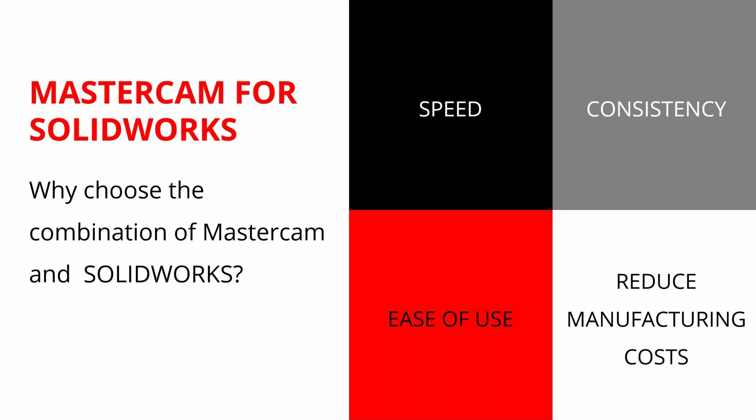So what we're going to be talking about, the first portion of this, is the design process. And how we do that is we use a table, much like the one that you see there, to update a design. I'm going to use a 16.5 ASME flange. For you guys that are familiar with that, you're going to see a lot of the same numbers there. So we're going to go through the design, and we're going to start with one finished design.

So we're going to develop one size, and in the model, I'm going to choose the 4-inch size to start with. Then we're going to go forward with an update using the table of dimensional values that we can source on the internet or get from our vendor or even get from our customer, and leverage the power of Excel to accomplish that.

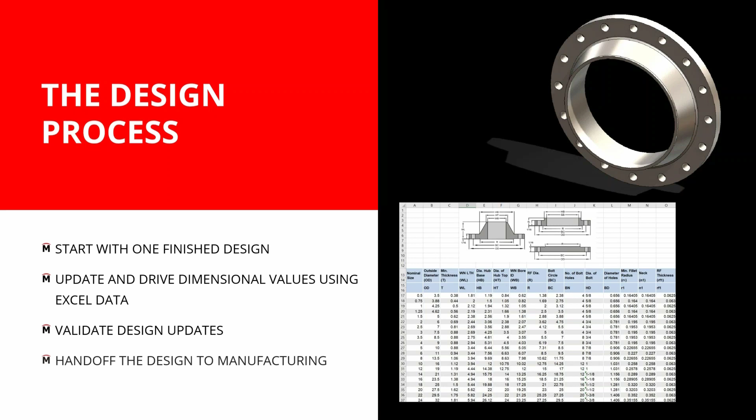Beyond that, we'll validate the design, make sure that all the updates are correct, dimensional values are good, and then we'll go forward with the handoff to Mastercam for SOLIDWORKS, and Danny will take it over from there. When we design something, this is the finished product of what we're going for. When we design it, we want to take an approach of how do we design it, how do we get that to go in correctly, and by doing that, we're going to create a revolve, and then we're going to do some other things.

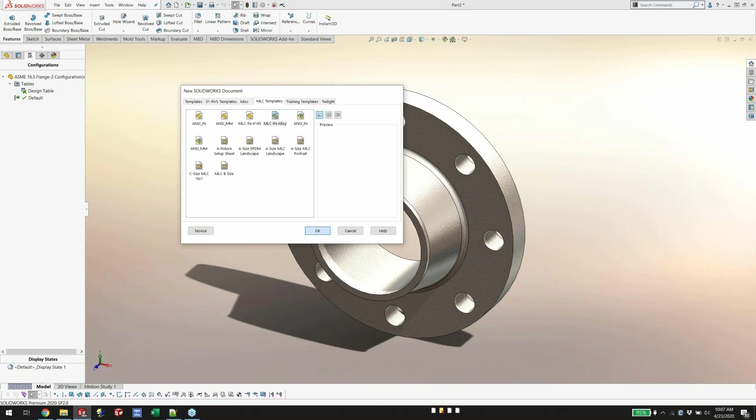So I'm going to show you guys how to accomplish that straight away by just accepting a new design template. Taking that across, we can start with our Z in the correct direction in SOLIDWORKS as well, and just design away. Now, a revolve requires a center line or something to revolve about, and that's the first step in the process. So once we get that far, we'll then start to design the weld

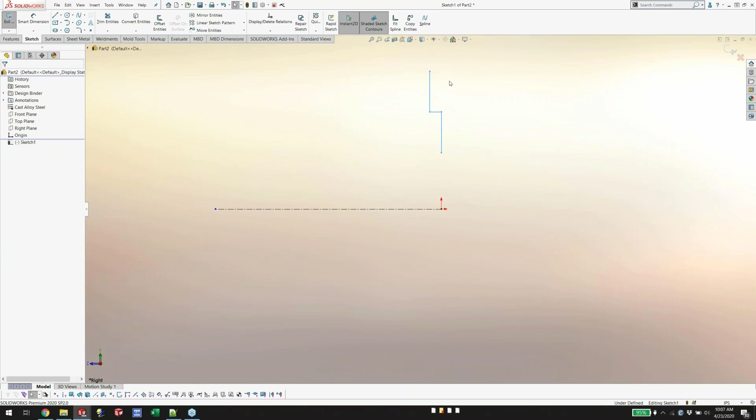neck itself. We'll just design a few things as we go along, and if you guys see something that I'm doing that you want to find out more about, don't hesitate to drop that in the chat, and we'll be able to answer that for you. But as we design, we'll take all of these automatic relationships and things that are happening in the design process, and we'll leverage that to create a finished design very quickly and easily.

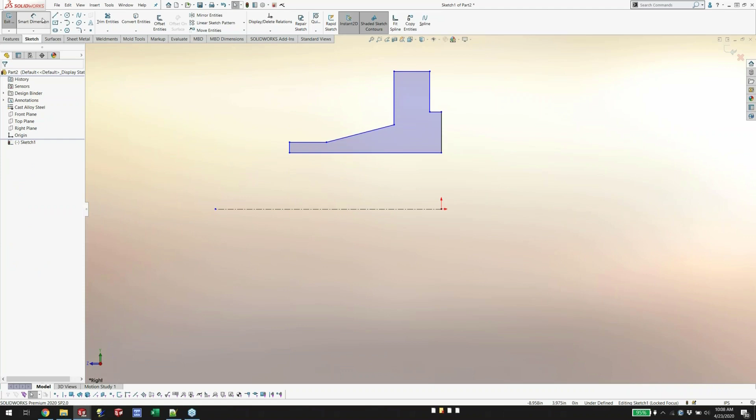Now, what I'm doing is just drawing out an exact profile of what we want. The first dimension value that goes on might be this raised face value in our table. And this particular value is 6.190. And in this case, I've drawn it to the half, so we'll make sure that we divide by 2.

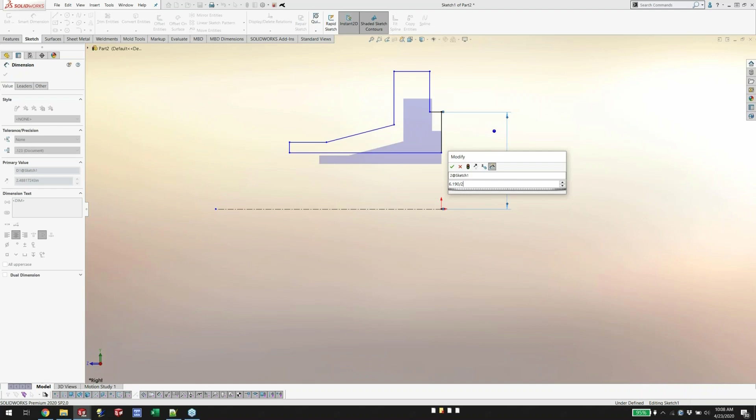SOLIDWORKS has the power to leverage fractions, additions. You don't have to break out the calculator in order to accomplish any portion of the design process. So taking this, we want to go ahead and put in RF1. Now I'm using the codes and I'm naming the dimensions as we go along, so that the dimensional values that we understand from ASME are also going to be held and be there.

So our thickness value, the next one that we need, pretty easy to do there. We'll go ahead and put .88. But if for some reason you forget, you can always open up that panel. You can always go through and relabel, redimension, and adjust anything that's necessary.

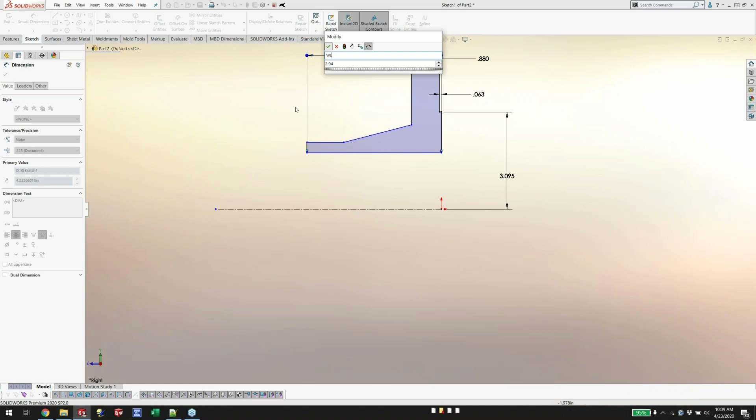Now, the few things else that I want to go ahead and accomplish here are just a few more dimensions. Let's go ahead and put in 2.94, and that is our weld neck length. So the length of the design there, great. Those are easy to do. Sometimes it gets inverted. We can go back and we can adjust the design, kind of reposition it. It's not a problem at all. We'll go through. I've got about 4 more dimensions or so that we've got to put in.

Things like the bore size, weld bore, and that number. We'll go ahead and put that one in. Let's see. Now I'm going to continue putting in the values that we need, and as we go through this, you'll notice the ease of use is coming along. I didn't have to choose that I wanted a diametrical dimension there. It went ahead and did that for me. By leveraging that, it understands that I'm in kind of a mode in the process and I'm batching dimensions, and it takes that into effect as well.

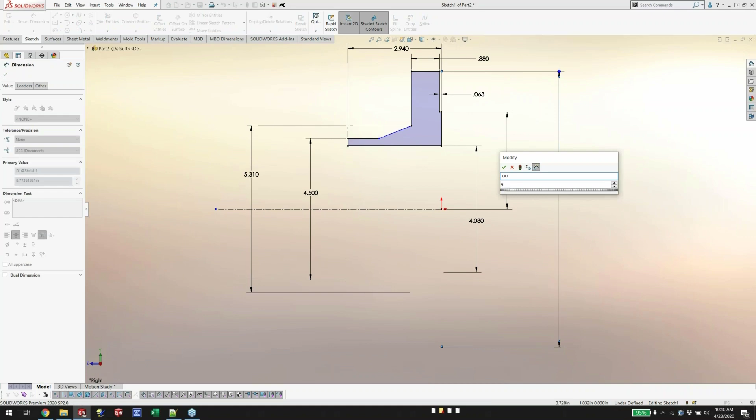So now the last one, but absolutely not the least, we'll go ahead and put the OD on this. We'll make that a 9-inch dimension and mark that as the OD. So as we get finished with this, you'll see that SOLIDWORKS understands that I'm just about done, and down in the bottom right-hand corner, you'll see that right now it says underdefined. And as we go forward with this last dimension, you'll see that that name will change to tell me that I have every dimension that I need for manufacturing of this particular profile.

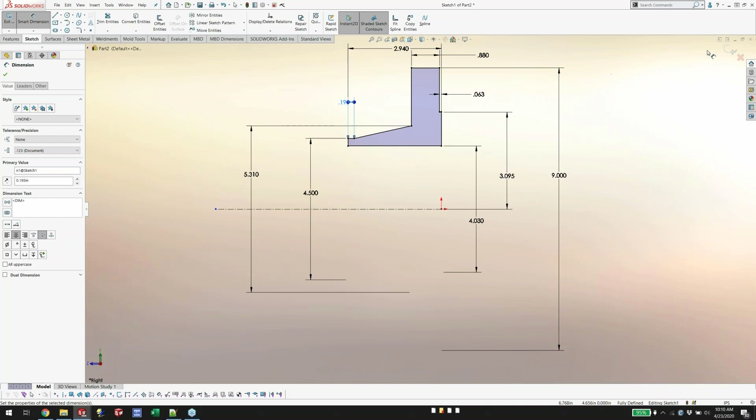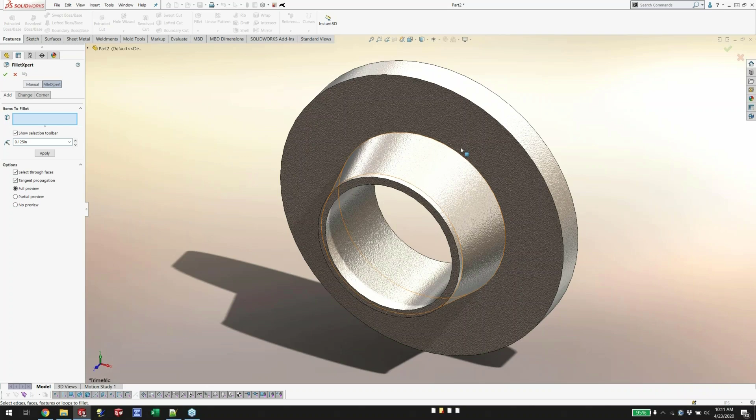As we go forward now, we can revolve this and take everything out to the third dimension. Go ahead and revolve the shape and create the basic shape for the weld neck. Now, the next thing that I'm going to do is add a fillet to it. So this particular fillet adds an edge, but I could very easily add multiple edges in the same fillet if necessary, or even round off an end. All of that's possible within the design, so we can take all those values.

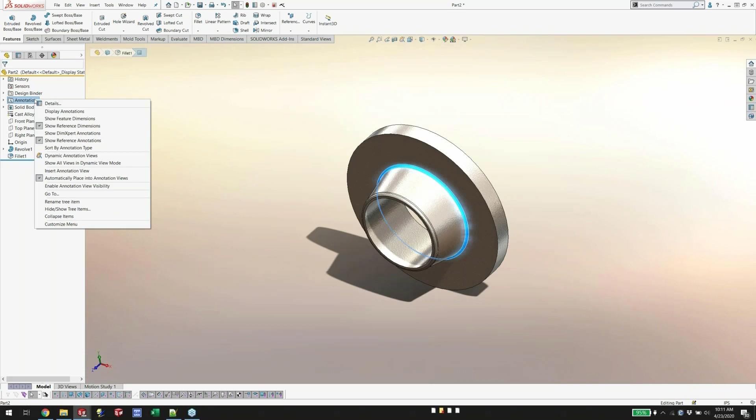Any one of the feature dimensions that we have, or anything that we need here, we can adjust by just taking a look at our feature dimensions. These dimension values for features are also in there. So in this particular case, we need to make sure that this particular fillet is marked as an R1 for our radius, and give the value that we need. So that's a pretty easy way to adjust the dimensions there.

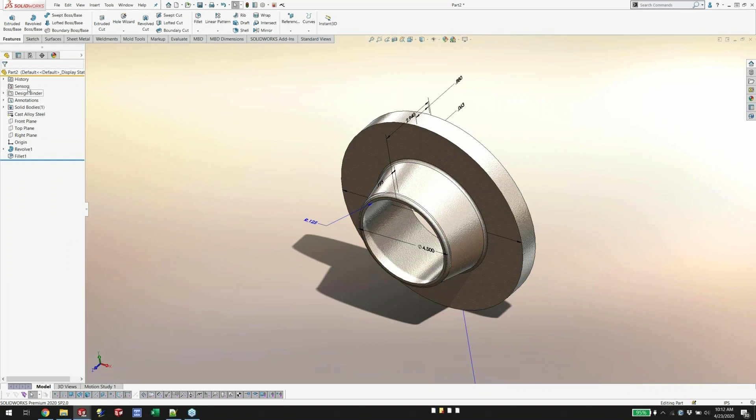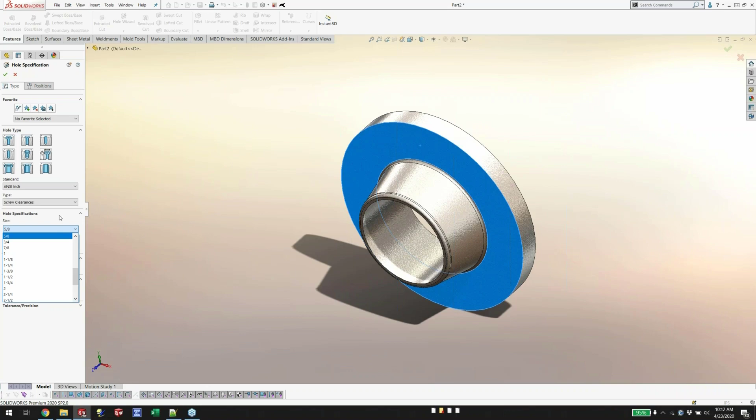The last step in the process is to go ahead and put some holes on it. So we have the power in SOLIDWORKS to use what we call the Hole Wizard. The Hole Wizard can help us leverage design processes for screw clearances in loose fit tolerancing, or even close fit tolerancing. I choose the particular size bolt that I want to put in, and it's going to calculate the tolerance based on that. So when we position this, we want to make sure that we have a bolt circle first. That bolt circle is going to define where this is located in the hole design.

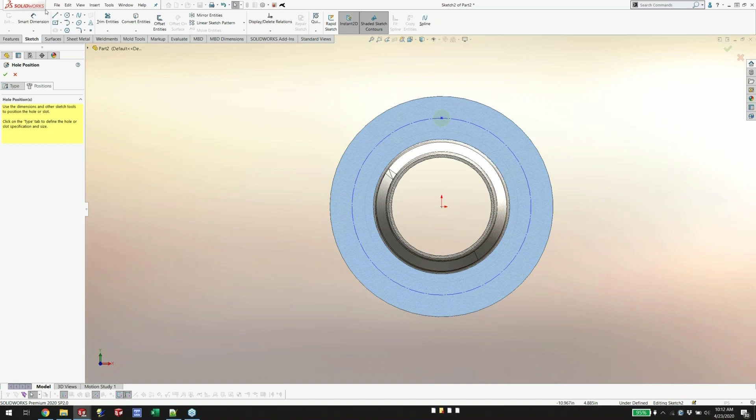Once that's done, we'll go ahead and place in our single top hole at the top dead center. Now, if you wanted that off at an angle, you could absolutely do that. Just dimension a few reference lines, and you're all set. This number is 7.5, and we want that to be the bolt circle, so indicating that as well. So I'm almost done. I think we're pretty close to being finished up with the weld neck.

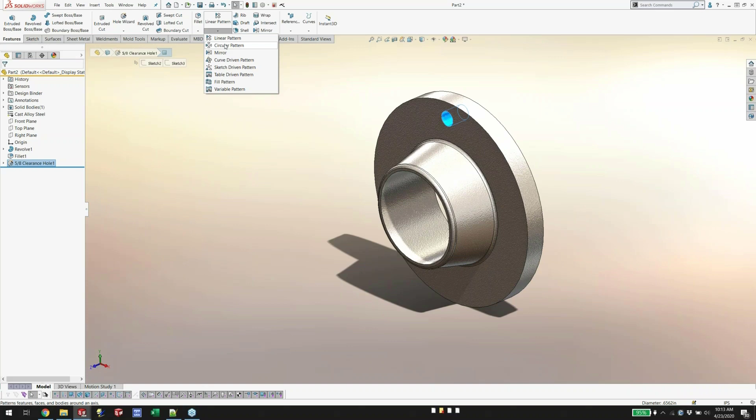The last step in the process is to take this circle and have it come across in a circular pattern. So we can make choices as to how many holes we want, maybe a dozen; 8, I think, is the right number in the specification. But it's very easy to go ahead and adjust that and have that finished design complete very, very quickly. Now, that's the first step in the process.

Once we get done with the design process of just the first component, and this is the 4-inch weld neck, I want to go ahead and get maybe a 5-inch or a 6-inch or an 8-inch, whatever the number is, right? So in order to do that, we're going to start with this default configuration, but I'd like to go ahead and add an additional size. Very easily, I can say second size, and this isn't going to be complete, but I want to show you that we can vary individual sizes depending on what we want to adjust.

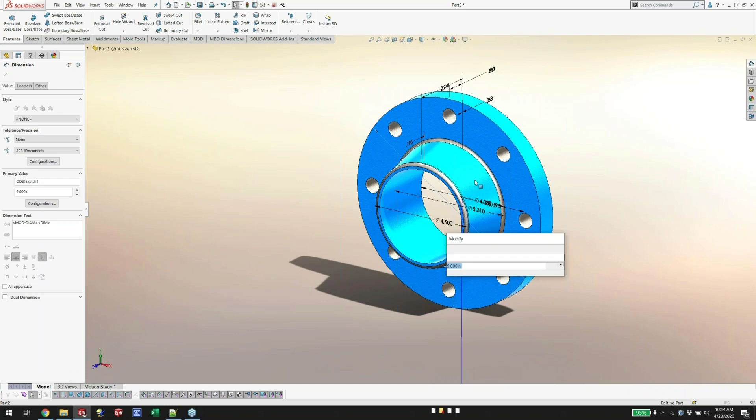So, for instance, if I wanted to adjust the overall 9-inch dimension from one to another, I can very easily just manipulate the dimensions within that particular design and say, you know what, I want this one to be 10 inches, for instance. So once I do that, you'll see that I have a variance. I have 2 different configurations or variations of this particular component. I have my default and I have my second size.

So what we're going to be doing today is we're going to be using a design table to drive this change. By doing just that little bit, I've been able to create a second size, but we want to expand on that. We want to do the entire table all at once. So being able to do that through a design table is the way we accomplish that in SolidWorks.

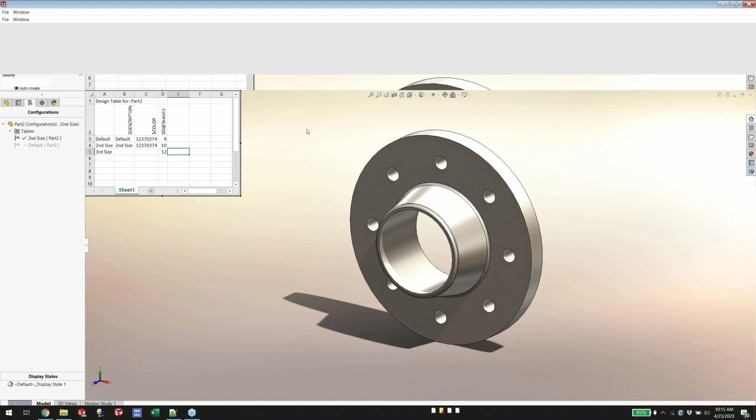When we select the design table, it's going to bring up a set of choices for me for bringing in the OD dimensions. If I wanted to add a third size, for instance, we could go ahead and do that as well. Now, all of the dimensional values that we put in, we could say, you know what, the OD is 12 on this particular one. What's going to happen is it's going to generate a third set of dimensional values for me and be able to put that third size in. Now, all of it is table driven at this point.

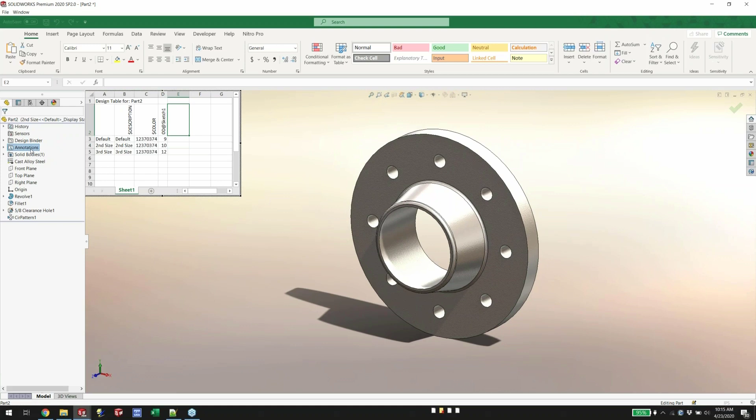This particular design table, if I go back and edit it, it would potentially collect some of the information. Now, what I'm looking to do is I'm looking to grab additional dimensional values within my table. So I'll need to go through and collect some of the other annotations and values that we want. So using our feature dimensions like this overall bolt circle, as well as the 10 dimension that we already have in the table, all of these dimensional values can be brought into our table very, very quickly and easily by editing the table and just double clicking those dimensions.

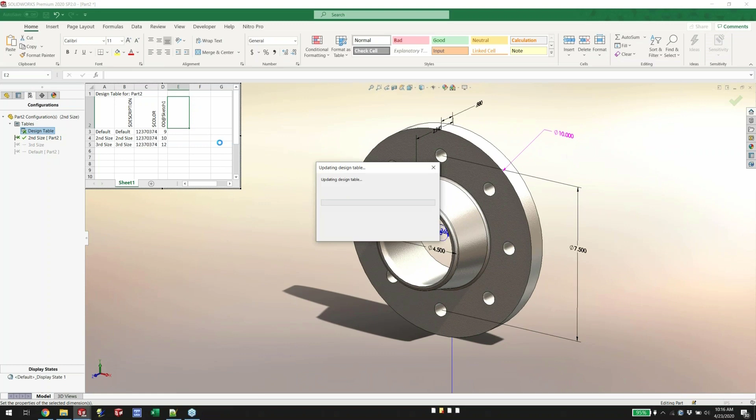Now, let's get in there and just add one more or two more so you guys can see kind of how this works. When we add these dimensions like this thickness or the weld neck, you see how easy that is to kind of configure and add additional geometry and dimensions to it. Now, what I'm looking to do is I'm looking to get all of this in a certain order for us so that we can bring in the entire table.

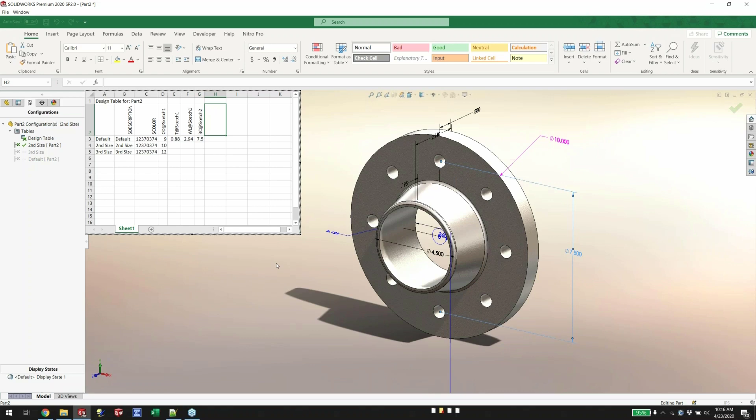Now, not to waste time going through the process of getting all the dimensions in the correct order, I've staged up a drawn part here that is exactly that way. It has the table finished out, ready to go for import. And what we're going to do is we're going to take an Excel table for the flange that we sourced off the manufacturer or off the internet or off ASME, and we've gotten that data.

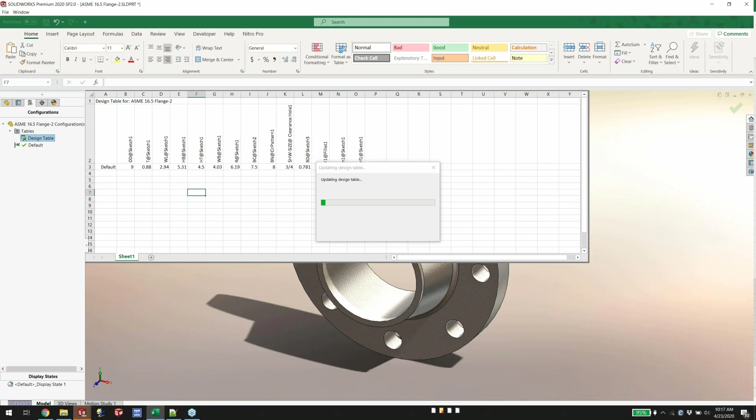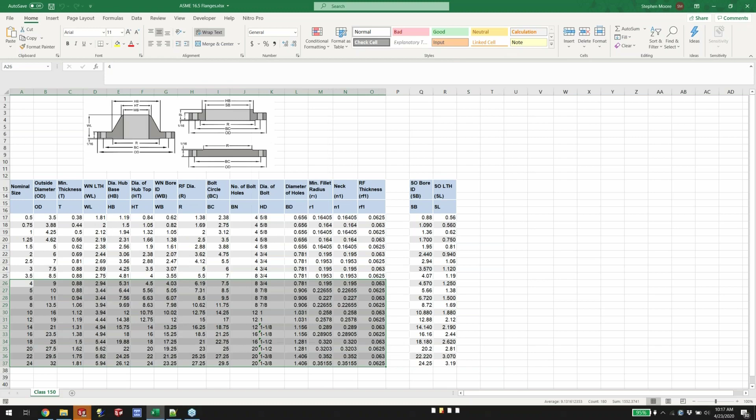So the data itself comes in something like this. We have all of the tags that we put in for the dimensional values, and we'd like to go ahead and develop our system for 4 through 24 inches, right? So I need to take this data and copy it directly from Excel and put that into our table. I've been able to take a multitude of pieces of information and develop that. Now, what's going to happen when I exit the table is it's going to say that I've developed 4 through 24 configurations all in one shot.

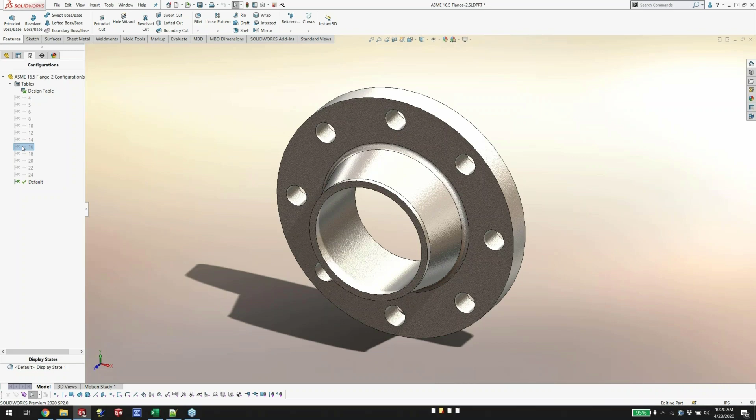Now, this design table set of configurations has been developed for me. The last step in my process might be to reorganize it a little bit. I might want to show them in a numeric value list so that I go from 4 to 24. I can also select individual sizes to verify that, sure enough, it's the right size, the way that we wanted it in the particular design, measuring individual component sizes. You can see the diameter of this particular size is 25 right here in the bottom right.

So at this point, I'm ready to transition and take this from a design realm into a manufacturing realm. And that would be the use of Mastercam for SolidWorks. So I'm going to hand this off to Danny, and I'll email it to him, or maybe we'll have a network share or a PDM system. We'll go ahead and do a transition from the design side to the manufacturing side. So Danny, if you wouldn't mind taking over the presentation and starting with our design, we'll get on to the next phase of this.

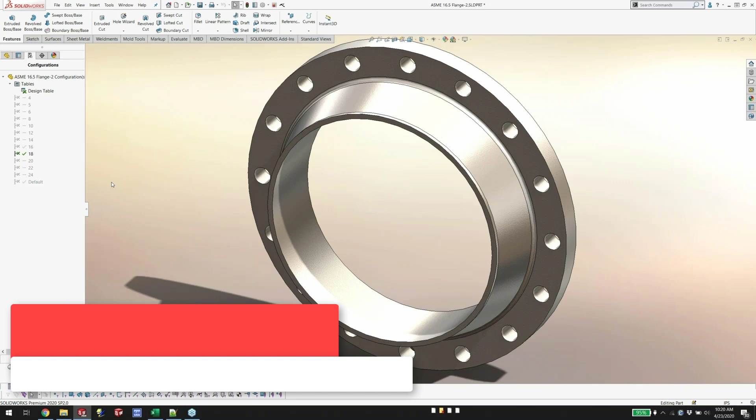So Stephen emailed me the part. I have it right here. I've opened it up in SolidWorks. I'm going to get right into this. The first thing I want to do is, by default, I have a mill set up. So I'm going to do a few extra little steps, taking Stephen's work here. The first thing I'm going to do is I'm going to edit this table in a new window.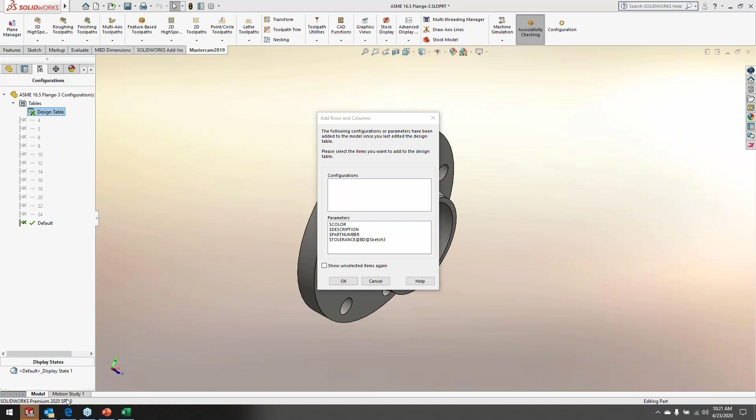And I'm going to go ahead and cut this for the time being, because I want to reassign everything to a lathe profile. I'm going to temporarily go ahead and get rid of these configurations. Sorry about that.

Then on Mastercam, I'm going to go ahead and make sure that I'm in a lathe mode. And I'm doing this so all the dimensions, when I look at those dimensions, they know they're in the DZ configuration versus XYZ for a mill. And I'm gonna go ahead and remove my mill.

And the plane, the way the part is set up, is not configured for a lathe. So I'm gonna just simply take this plane. I'm gonna copy him, rename him. I'm gonna go ahead and move the origin to this face right here. That's where I'm gonna start my part when I put it in the machine, in the lathe. Then I'm gonna go ahead and set up that work coordinate. So I got my work coordinate in the diameter and in the Z for a 2-axis lathe.

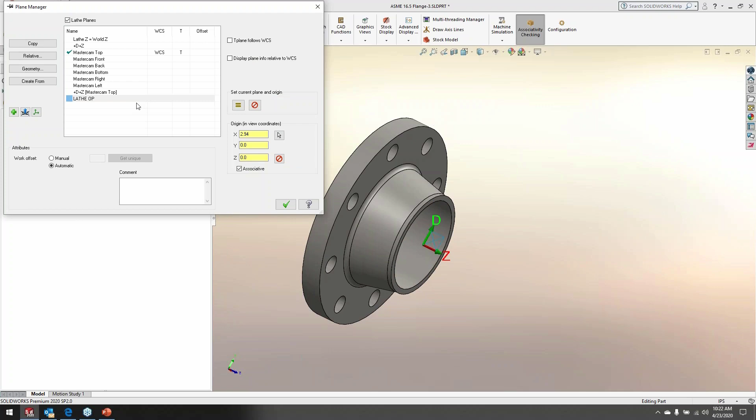Select OK to this. While I'm at it, I'm gonna go ahead and just make some quick modifications to his sketch. Let me flip him around a little easier so I can understand that it's coming from the lathe here. I'm going to add 2 points. Now we can add this to the design table if we wanted to, but for today, I'm just going to sketch them up here. I want to add a few dimensions.

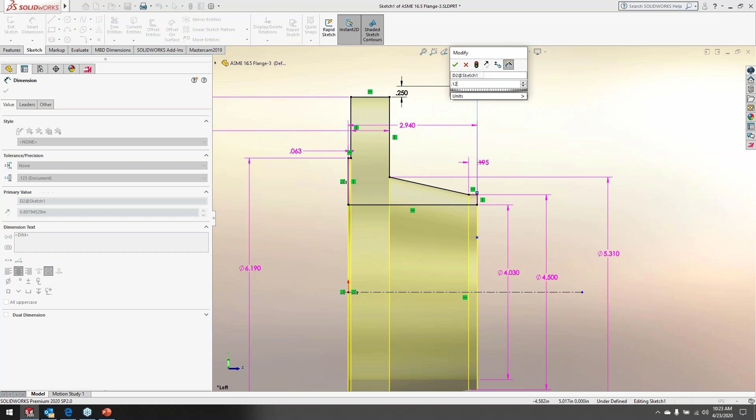This is what's going to help me drive a facing operation. And these dimensions will change as we change the part as well. All right, select OK to that. Go get this sketch here. Now, so I can show you, I'm going to go ahead and make this visible for the time being.

In my lathe, I also want to make sure that I'm in the right construction plane. Go ahead and set it to lathe here. While I'm at it, I'm going to edit the machine here. So I have a machine that has upper, left spindles, right spindles, upper and lower tools. I'm just going to use just this left spindle group today. And I'm going to adjust the max RPM for this chuck and just say 1,000 RPM. Select OK to this. Go ahead and say OK to the whole thing.

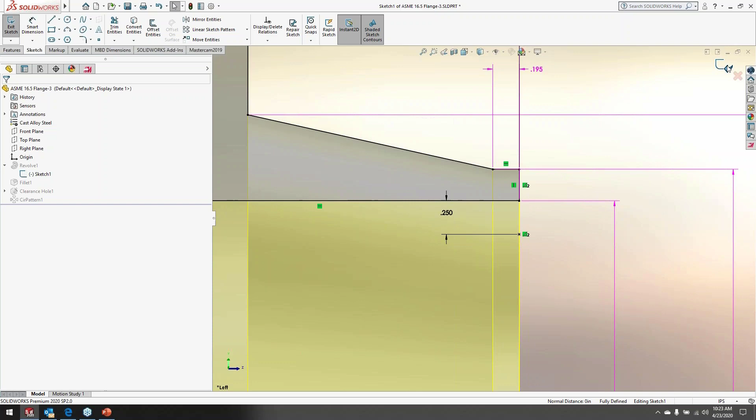And I'm going to put just a few simple little toolpaths here. So first thing I want to do is I want to put a facing operation. I'm going to grab this tool here and select the points that I created on that sketch as the volume that I want to face off. I'm going to go ahead and do a roughing operation, or a rough step over. No need to finish past this.

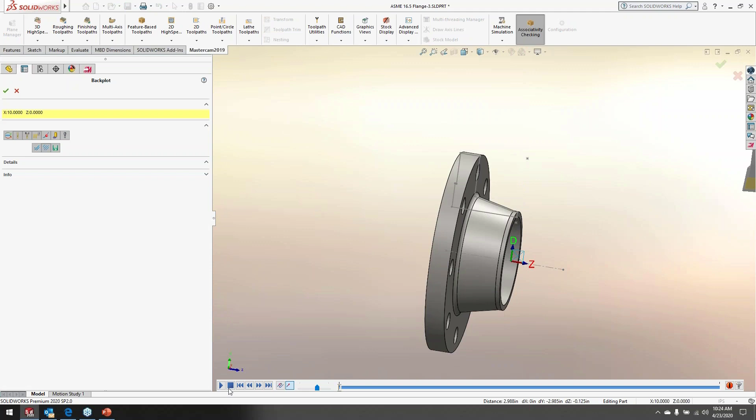And I'll select OK. I can go ahead and backplot this, and it shows me my tool. It'll come in. That'll be the raw material. It'll have an ID, so I don't have to go all the way to X0. I'll select OK to that. Let's go ahead and hide him again, kind of clean things up.

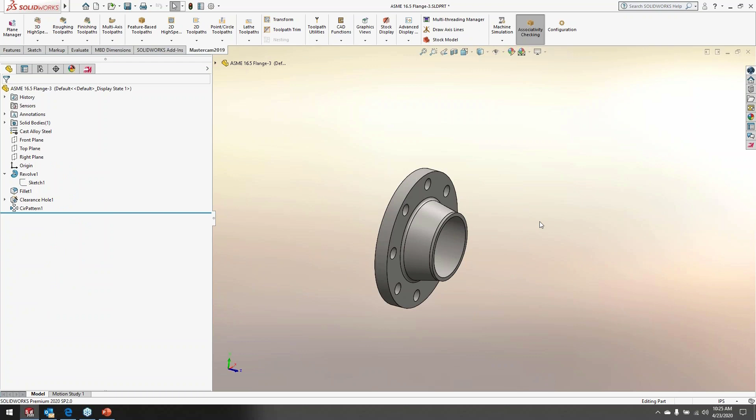Now I'm going to go ahead and do a roughing operation. I'm going to say rough, and I'm going to pick that sketch again. Mastercam for SOLIDWORKS is going to create 2 chains here. In other words, I have 2 options. Do I want to go ahead and bore the ID, or do I want to cut the OD? So I'm going to take this one, delete it out. Then I'm going to modify this one.

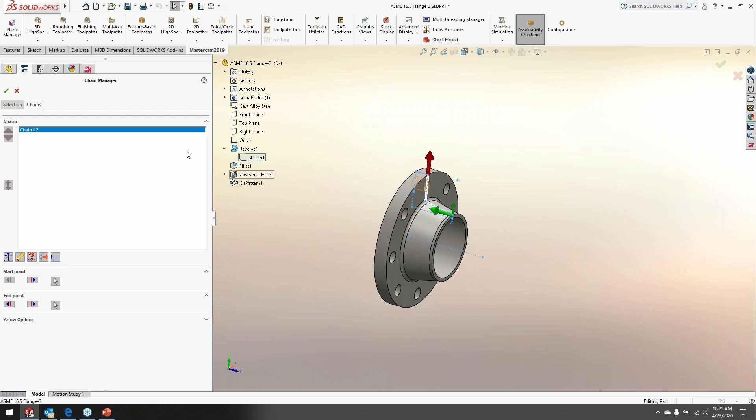I'm going to hold this part somewhere on this upper flange. So I just want my tool to stop right here. I'll select OK to this. I'm going to select the same tool. I can even force an operation or force a tool change. Give it a comment for your machinist to understand what's going on.

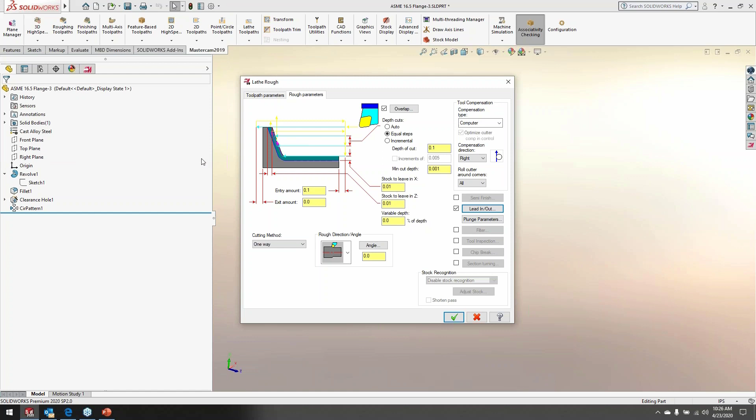And let's just say on the exit, I'm going to go ahead and extend it out that same 1/4 inch that I defined with that point. I'll select OK to this, and I have my roughing operation. Go ahead and clean this up again. I'm going to turn the display off. Now I'm going to go ahead and drill some holes here, these bolt holes. We'll go ahead and do a C-axis face drill.

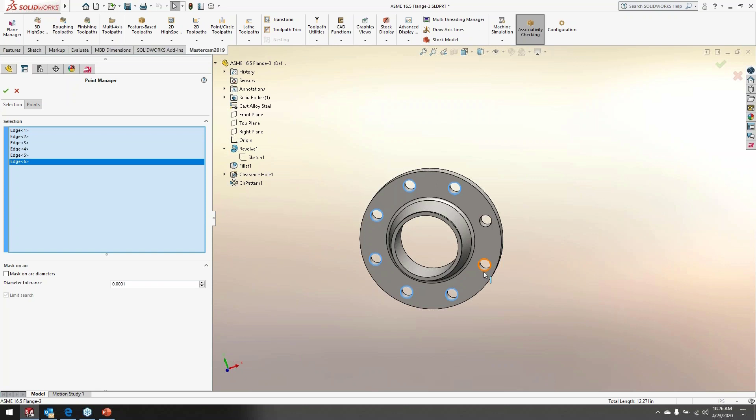I'm going to manually select my points. Okay, I'm going to confirm that my points are in the center. They look good. I'm going to select OK to this. I'm already in the right construction plane. Mastercam is intuitive to know that I'm changing the direction of the tool. I'm going to go ahead and select the tool from my library. I'm gonna grab a 1/2 inch drill.

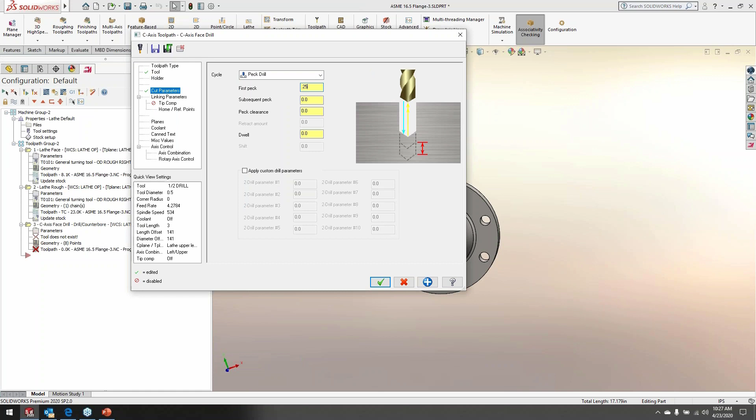Do a pecking cycle. Give it the pecking amounts. Allow for tip comp to make sure that it breaks through. And then my linking parameters, I'm gonna give it plenty of room for it to retract out. So everything is set incrementally from wherever the feature is at.

And I'm gonna go ahead and set my depth and tie it in to this back face right here. So as the part changes in the design table, this value will always change as well. I'll select OK to this. And I can go ahead and backplot that. Now it's gonna go ahead and drill those holes. Now I'm gonna go ahead and finish them to size.

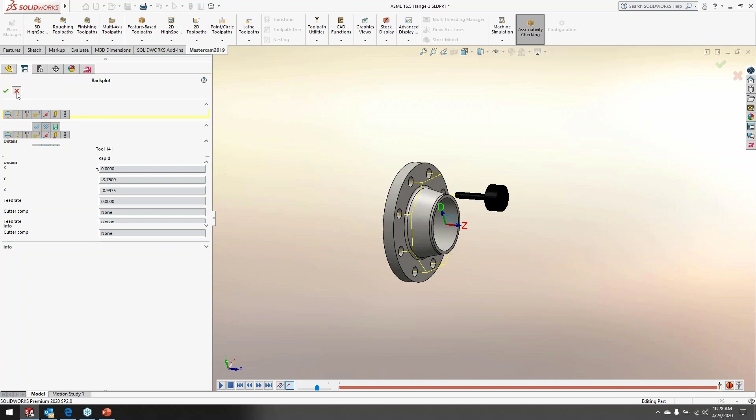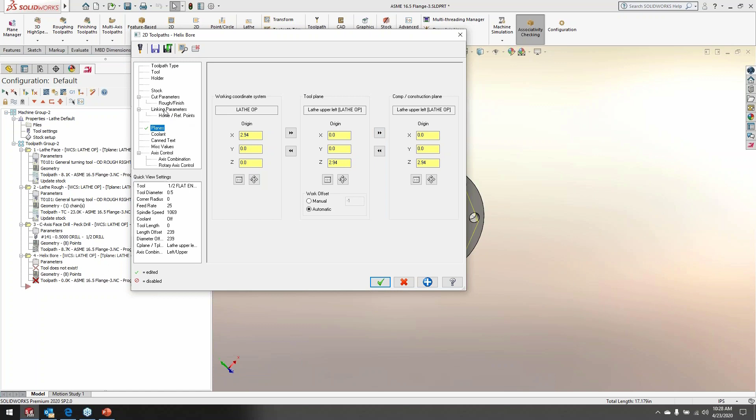Let's go ahead and do a helical bore so we can finish them. And the same thing, I'm gonna go ahead and pick the edges of the holes. I'll select OK to this. Now, since this is a milling operation, I'm gonna double check here, and I wanna make sure that I do pick up the C-axis plane. And then the same thing, I'm gonna set everything to incremental.

My depth, once again, to this back face, 1 inch, incrementally from wherever the feature is at. In my cut parameters, I'm gonna go ahead and enter in at a 45-degree angle. I'm always gonna start at the center, make everything to size.

I'll answer that phone call in a little bit.

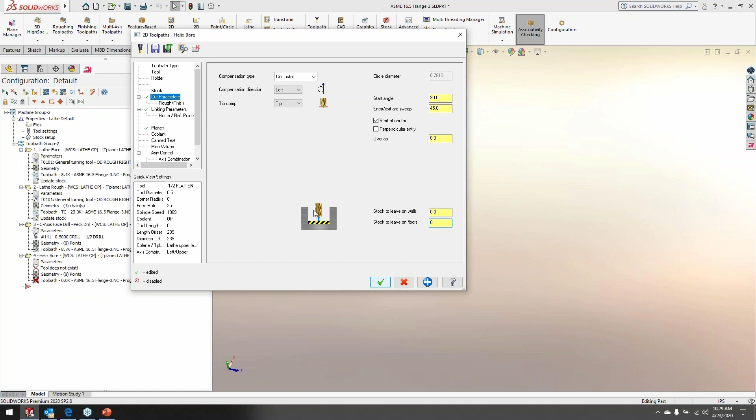I'll select OK to this. And then I have my, oops, you know what? It automatically picked me a tool. Let me edit that tool. I'm going to extend it out just a little bit, a little longer here. Update that toolpath and see how easy it is to just go back and change any information that you're doing for your toolpath.

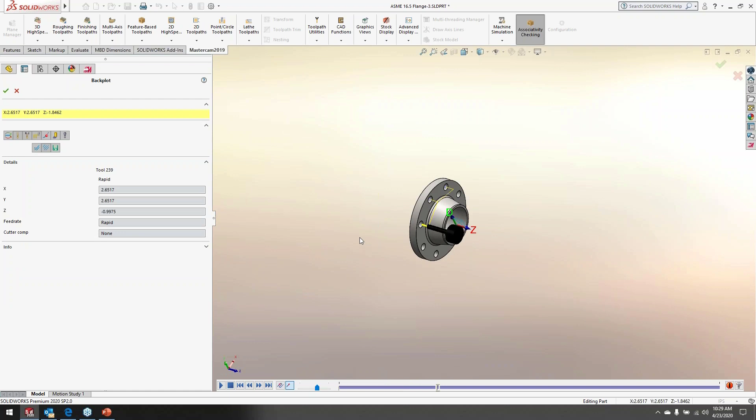So now it's going to do the finished diameter of the bore. And as the bores change, it'll change as well. So we'll go ahead and click OK to this. So I've got the first part set up. These are the toolpaths I want. Now let's go back to that design table here.

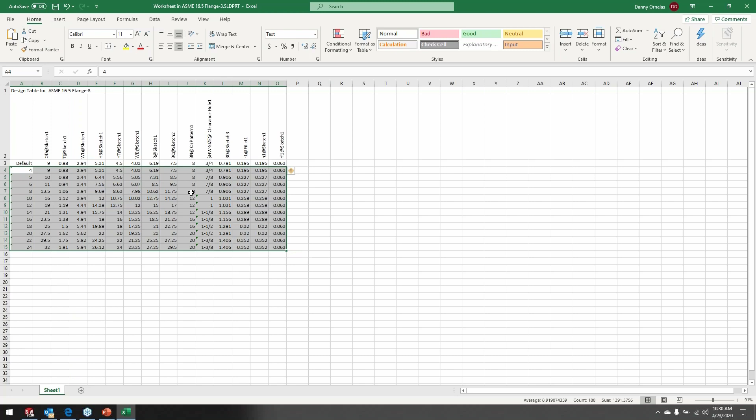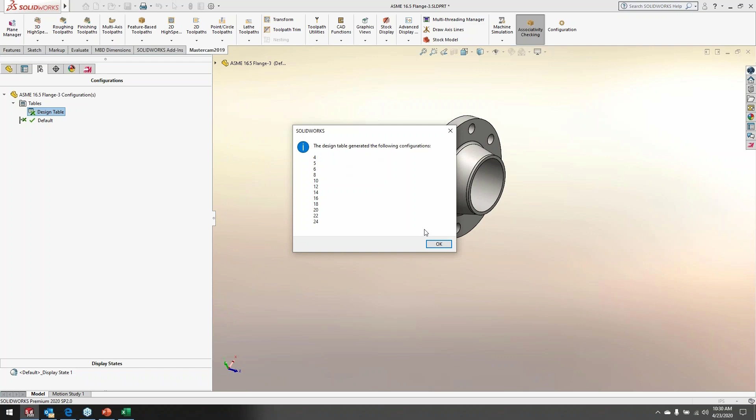Now I'm gonna go ahead and repaste everything back in here. I'm gonna save it. So now it recognizes these values in this new plane. So now it's gonna say, do I wanna copy all the toolpath information that I put onto the default part? I'm gonna select OK to this. It's asking me if I want to do it to all configurations, and I'll select OK. And like Stephen, I've generated a new configuration table here. So here's all my parts.

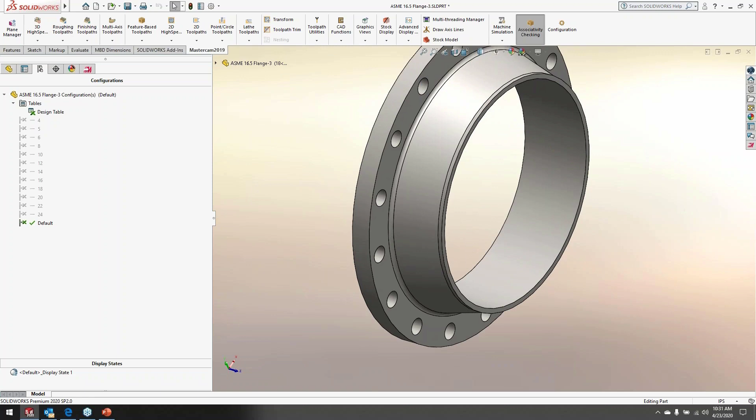And I also have a quick utility here. I'm going to go to my utilities. This is where it comes, as Stephen mentioned, for speed, consistency, accuracy, and all the other things we talked about. I want to go ahead and regenerate all the configurations at one time. So what Mastercam is doing is reading these configurations and updating all the toolpaths for all the sizes of these weld neck flanges. And I was able to do that with just one button here.

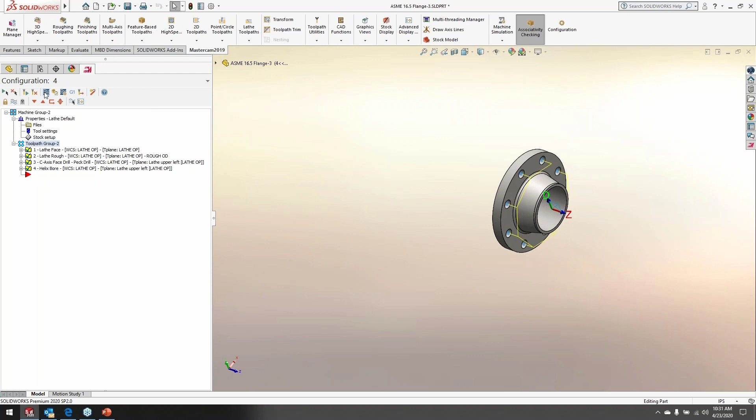All right, so let's check this out. I'm going to go back all the way to the 4-inch one here, show this configuration, smaller one. I'll go back to my Mastercam toolpaths. I can backplot that. It shows that it's cutting that part right there.

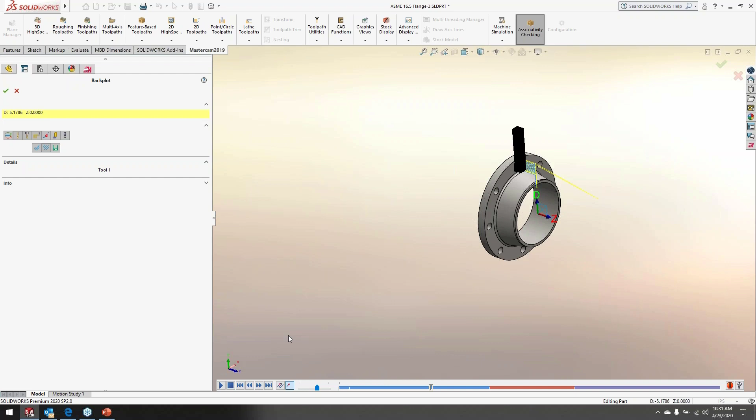Okay. Let's go to a different configuration. Let's say the number 8 right here. Show this, little larger size. Go to the Mastercam tab, and the toolpaths are associated to that size. So all the work Stephen did up front made my job very easy.

Okay. And I don't know if we're answering questions or not. Who's monitoring? I can't see if anybody has any questions or not.

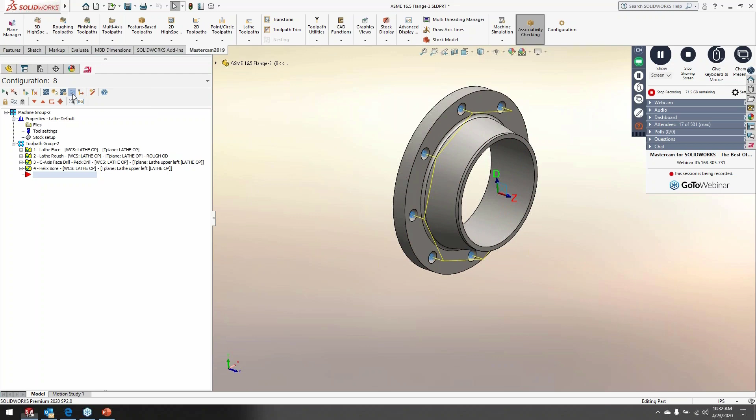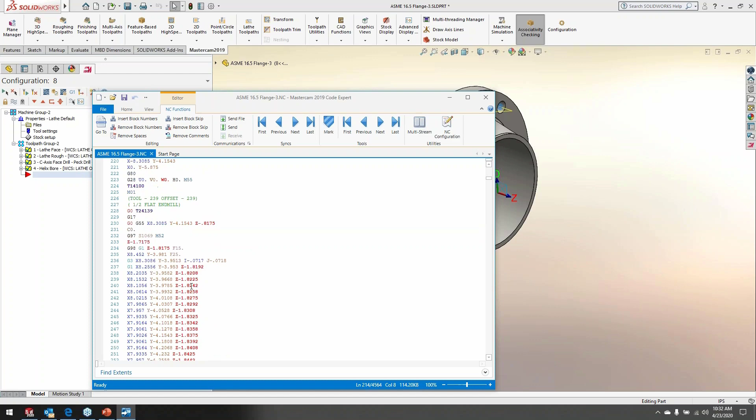Okay. So at this point I can go ahead and post it out if I wanted to. And I would get code that would be for that particular machine. And I could post them all out for the different changes. There's my code right there. Roughs it out. There's my C-axis drilling. And then there's the helical bore right there for each of the holes.